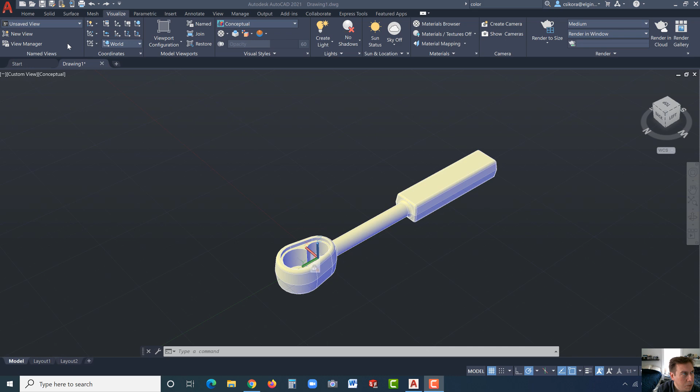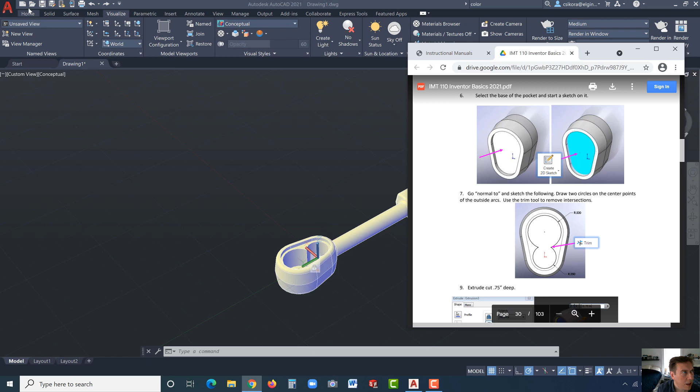So let's begin. First, I'm going to go to New Part, and we're going to use AutoCAD 3D. Again, I'm not setting anything significantly different than the installed version, so I don't really modify it heavily.

One thing though, I do like to go right away and use 2D wireframe, and we toggle back and forth, but 2D wireframe is really nice. And then I also like to go to the top view orientation and just rotate it 90 degrees counterclockwise so that the Y is in the upward direction.

Now we're going to start off with some sketching. We're going to sketch the head and create the head and the features in it, and then we're going to create the other features. Again, there's probably 30 ways to build this model.

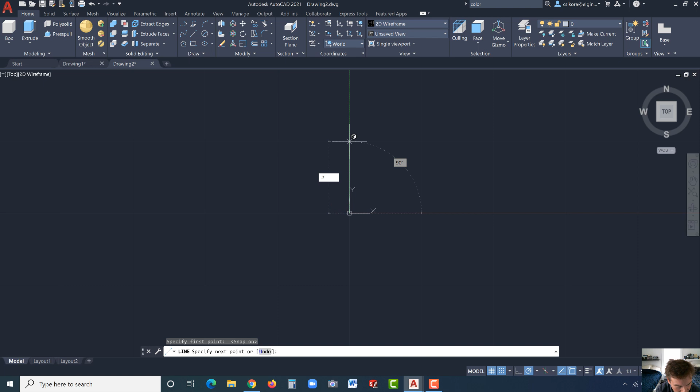All right, I went to the line tool, then I'm going to go down here to snap on, just so I could snap at the origin. Click, and I'm going to drag this up. We want this to be 0.75 in height, and that's actually going to be the distance between the two arcs that we'll see on the head of the ratchet. So I'm going to hit escape after I got that in there.

Now I'm going to proceed. I'm going to use the center radius. And the reason I'm using the center radius is because that's in the textbook that I have, that's what I ended up using.

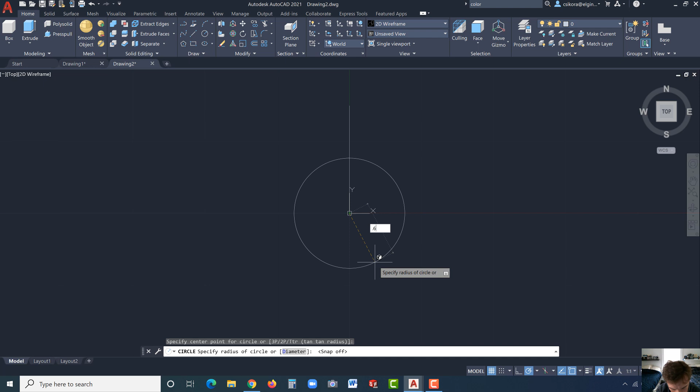So right away we see some issues with the snap-on, so I'm going to turn this off for the grid snap. Let's go ahead and put in, first of all, for this, 0.6. And then now this one we want to snap to—let's hit enter again, snap to that center—and this is going to be 0.75.

Okay, now this is where we're going to use some parametrics. I know there are ways to make tangent lines and other methods, but I like to incorporate parametrics from time to time to show you, because this is truly the way most CAD systems work these days. AutoCAD—I used it starting in 1986—and parametrics wasn't in there, but it came out the next year in other CAD systems and filtered down into AutoCAD eventually too, so it's a very nice tool.

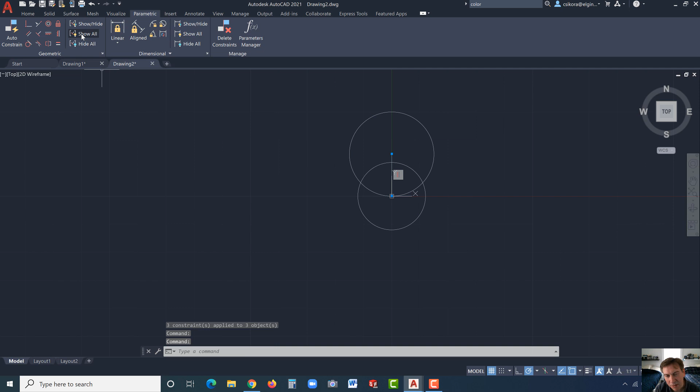So let's go to auto constrain, click and drag around those, hit enter. If you want to see what it did, just hit show all, and you see it just made a vertical line there. But let's go ahead and start adding some dimensions here.

So let's go to the radius tool and click on the bottom there, drag that down, click—it's already at 0.6, so just hit enter. And let's hit enter again, click on this edge. My preview isn't showing, but that's okay, 0.75.

All right, one other thing I'd like to do is use the lock tool.

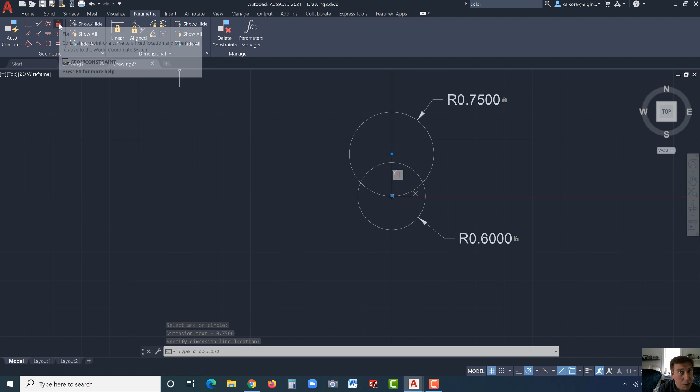Now by locking down either the top or the bottom point, we're in good shape. We just don't want it to move around. I'm going to hit show all again, and you can see the lock down there. All right, so now we have some geometry there.

We're ready to go. Let's go now to the home, and we're going to take the line tool. Over here on the left, away from the head, click and drag a little line, maybe 1.5 inches or so at a slight angle, hit escape when you're done.

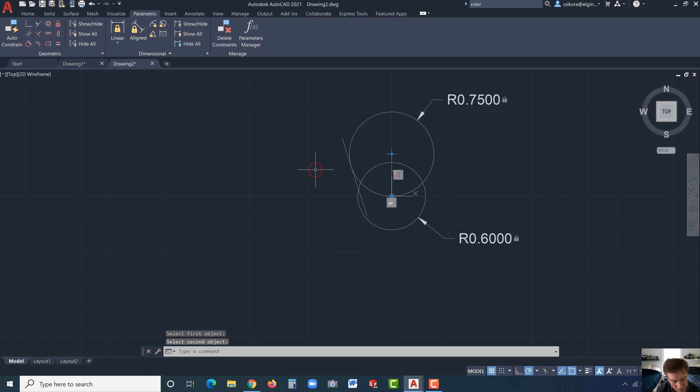Now we're going to go back to parametrics and use the tangent feature and select the circle. We'll go with the 0.75 first, and then the line, hit enter. Hit enter again, go with the circle down at the bottom and the line, and you'll see it should align to each other. So now we could just trim.

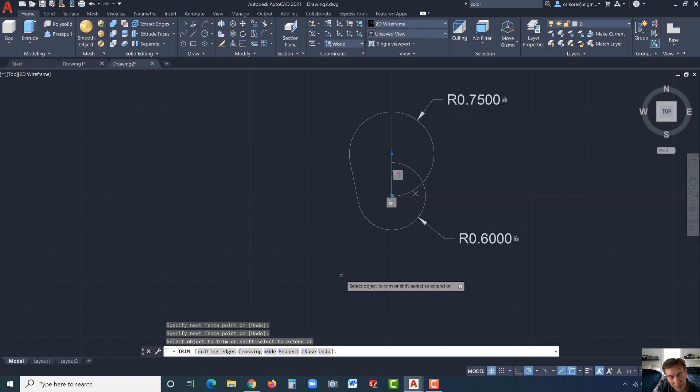Let's go over here to the trim tool, home and trim, and I'm going to trim out this in the middle and get that out of there. And then these little segments. That's why I had to draw it a little bit bigger so that you could trim it up. Now, if it wasn't aligned, you could use the extend as well.

All right, now I'm going to hit escape. I'm just making that half. I'm going to mirror that over to the other side. So let's go to the modify down here, find mirror, and select this line right here. Hit enter and center to this top center point, click, and we should see it on the other side.

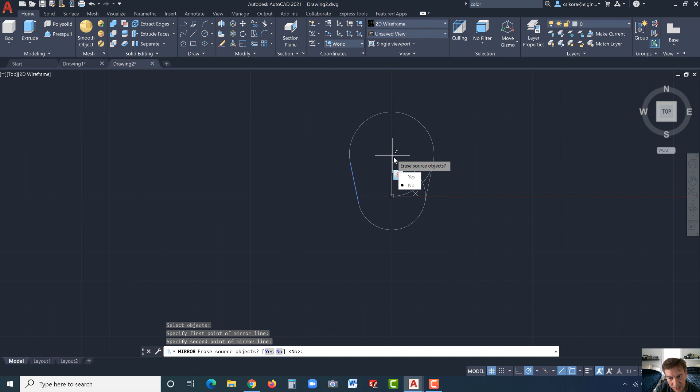So hit no, and now we could go to trim and just trim that geometry out. It's in there. Remember, you could always hit Control-Z undo if you did it wrong, and then trim it again. I'm going to hit escape. All right, so we have the basic form of the head of the ratchet.

Now, what I like to do with AutoCAD, because of the way it works, is I like to put the other details in as well. So, for example, let's go to the circle tool. We have some, actually, let's see the sizes here. You can see here we have this pocket we're going to make.

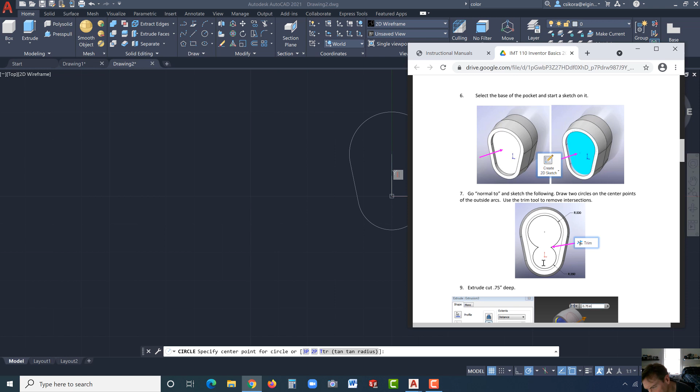The offset, don't worry about. We'll take care of the offset. There's a really nice tool for that. But these are 0.35 and 0.5 radiuses.

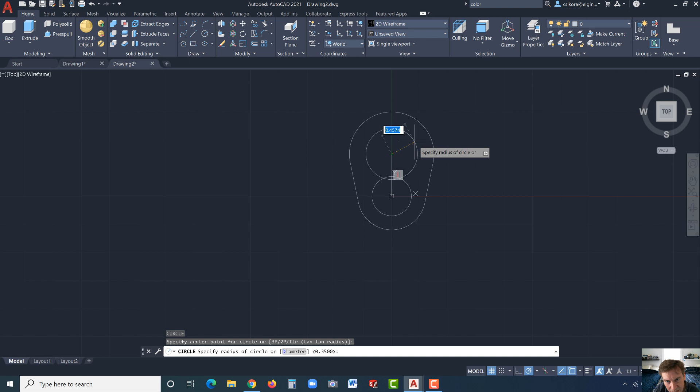So that means we should use the radius tool. So center radius, and just click down here, 0.35, and now hit enter again, get that center point there, drag this out, and this is going to be 0.5. All right, so we have those, and we're not done yet.

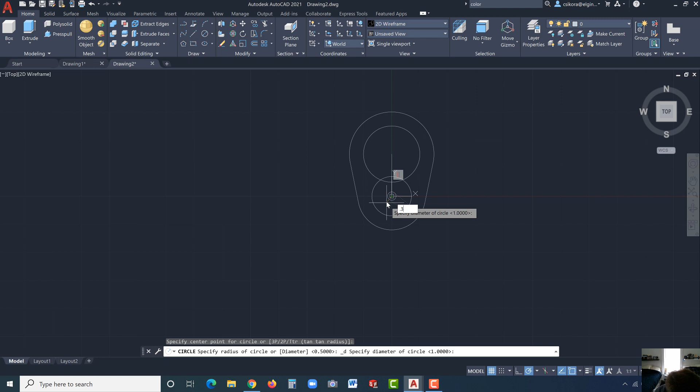Now, there are some through holes that are going to go in there as well, so let's take a look at those, and those are 0.375. And so let's go with, and those are diameter. So this time let's switch it, diameter. Enter again, 0.375.

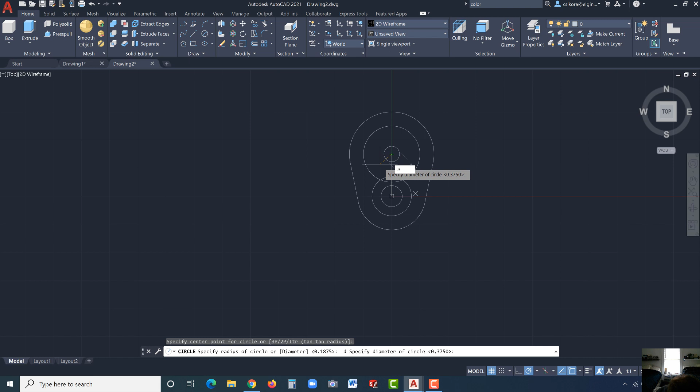Okay, I'm going to hit Control-Z. That's strange, I'm not sure why it did that. Let's go to the diameter again and just draw that up there. Okay, 0.375. It almost looked like it took a radius there. There we go. Okay, so we have the geometry that's suitable.

Now, there is a cool trick where we can make the rod that extends. It's called the transition section between the handle and the head. And we could draw it right on this plane and revolve it. But I wanted to show you how you could switch between planes.

Again, those of you who used Inventor, which is a plane-based modeler, whereas this is what we call a Cartesian-based modeler, where basically you have X, Y, and Z, and it's positional, versus planes you could actually work and sketch off the planes, which is really nice. But you have the ability to do some of that here.

So what I'm going to do, we'll first get this, actually we're going to go ahead and make the transition section, which is the rod, and it's 4 inches long from the center here. So let's go to the home button and see what's going on here.

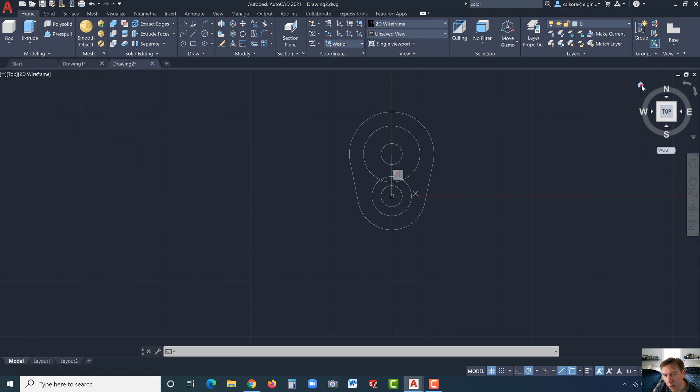All right, so we need to rotate our sketch plane so that we're actually 90 degrees. So that means we need the Z to point downward. So over here, we see we have the ability to do that with the rotate. Now, and this is going to rotate around the X. So click on that.

All right, we just want that to go straight up like that. Click. Now you can see the plane is rearranged, it's been rotated 90 degrees, and so we could go now to the diameter.

Right on that point, draw out a circle. Now look at that, it's rotated, so it's going to be 0.5. Enter. That's how you sketch geometry on different planes in Inventor, but here we're just adjusting the WCS, or World Coordinate System, or the UCS.

All right, so now that we have that, let's go ahead and extrude that right now. We're going to go to Extrude, click on that, hit Enter, and drag that out this way. It's going to be 4 inches. Hit Enter.

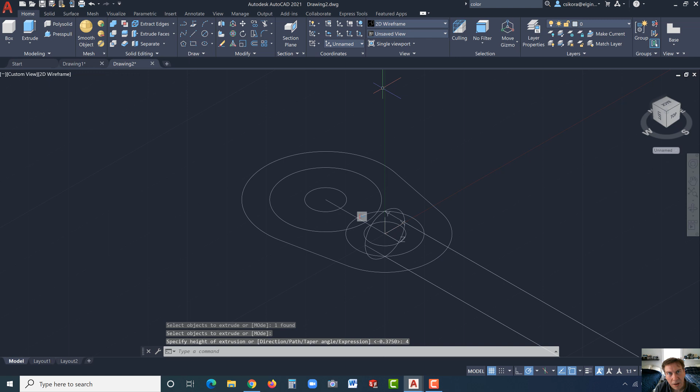Now we can at this time, if we want, change it to shaded in gray, and we could see our boss there. Let's go ahead and move on with this next thing.

We're going to go ahead and extrude the bottom of this geometry. So go to extrude. Now some of you are like, why aren't you using press pull? Press pull has a limitation as far as I could tell. If someone knows a way to do this without a trick, if you have to add draft or the taper, I know I could add it later, but I have not found a way to add it initially.

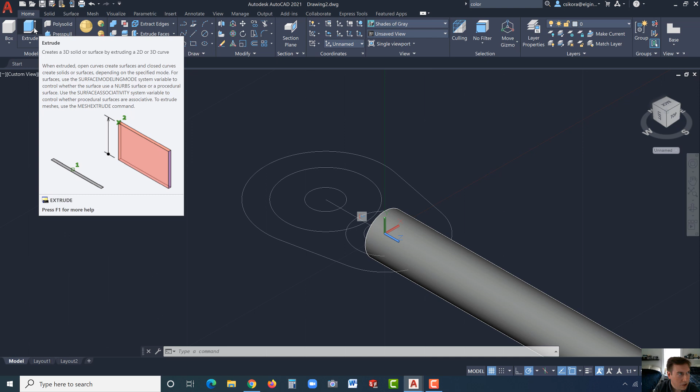So that's why I'm using extrude here. You go to extrude. This geometry, you can see it's all trimmed up, and that doesn't always work really well for an extrude - sometimes you get a collection of surfaces. So what I'm going to do is use the join tool we've used before. Let's join this geometry on the outer edge so that it extrudes as a solid. It's guaranteed that way.

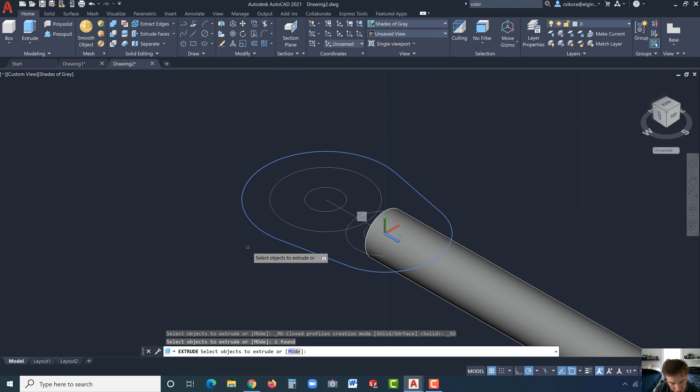All right, now go to extrude. We can now click on that outer edge. Hit enter, and down here we see taper, and we want it to be -7. Actually, I'm sorry, just 7. Let's go back there, taper, so just 7. All right, and we're going to have it go in the downward direction, and this is only 0.5.

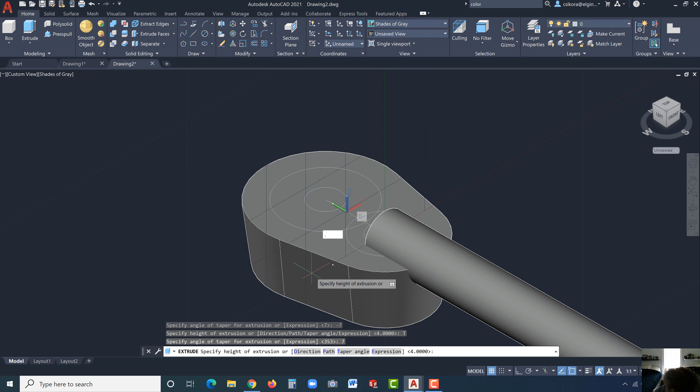All right, now we can mirror that over to the other side. So let's go ahead and do that. We'll go to mirror solid, select this geometry, hit enter. And now I like to go with 3 points.

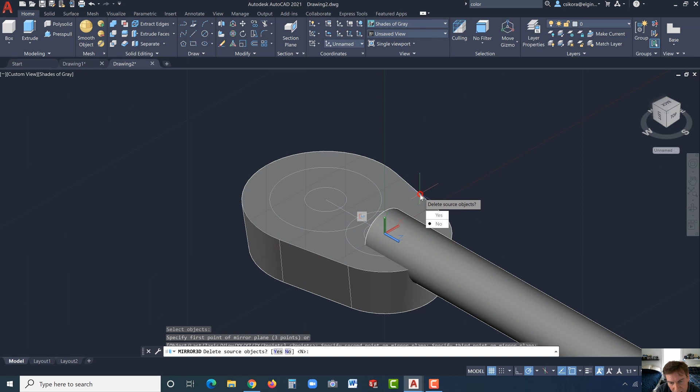There's a dozen ways, but with 3 points I can click on these corners of this model pretty easily, hit enter, and it mirrors it over. Remember, it takes 3 points to make a plane, and that's what it's mirroring about - basically you're making the mirror plane.

Now we could join all these. So over here we go to join, select this one here, and this one here, hit enter, and now they're one solid.

Okay, now we might need to go back to wireframe so we can see inside. Now, what I'm going to do here, I know that the geometry that we have here is going to need to be adjusted and so on. We have the through holes and we have these bosses.

Let's go ahead, and I want to extrude. In fact, actually, I think if we trim this geometry out, right there. Oh, you know what?

We have to get the plane back. So to make sure you get the plane back in order, just go over here to UCS World, and it flips us back. Remember, we had adjusted so we could draw that circle, the half-inch circle, so that brings us back. You could also click on World right here, and it rotates it. So now we could go back and trim on that plane some of that geometry.

So I'm going to trim that out right there. You got to be careful so that you have it looking like that. Now we could go join it again. You don't always have to join it. I'm not entirely certain of all the rules there, but let's join it anyhow.

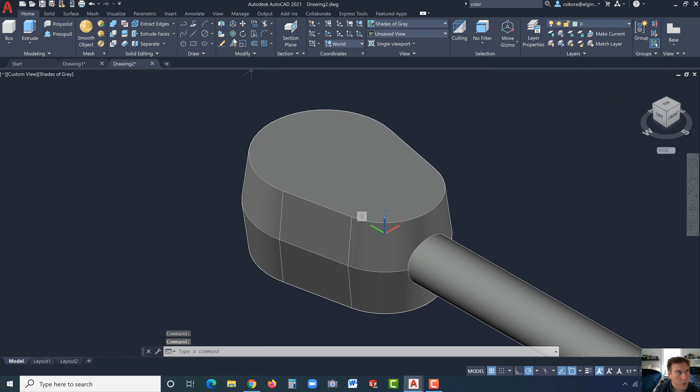Okay, and we'll use that a little bit later, but let's first get our offset. So now we're going to go to shaded in gray, and we're going to use, under solid, there's a really cool tool, offset edge. Select this face, and you can see you could draw this in. Now it says specify a point. Be careful when you enter this information. Instead, we want to go by distance. So I'm going to go down here to distance, and we're going to type in the distance offset is 0.125.

Okay, so we hit enter and then select this face, and it should go inward. So we have that offset geometry. It's a little tricky. You might have to watch me do it again. Just rewind and watch it if you get stuck on that one.

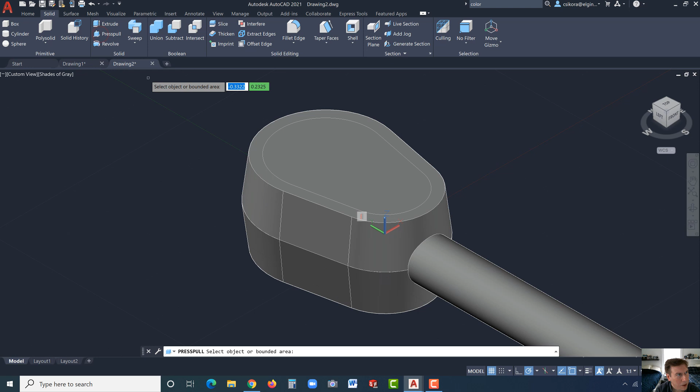All right, now we could go ahead and this one, I'm actually going to try using the presspull. I've had some issues with presspull every once in a while, but let's give it a try. I'm going to click on that and drag it down. This needs to be recessed 0.125. And there it worked beautifully. So most of the time it works beautiful. When I was making this earlier, I was having some difficulty sometimes, and it might have been just sloppy geometry on my part.

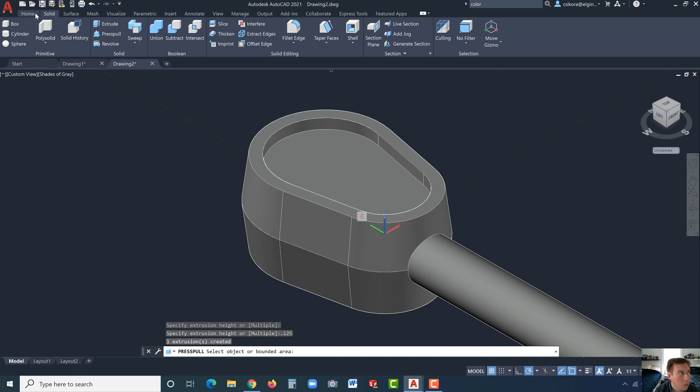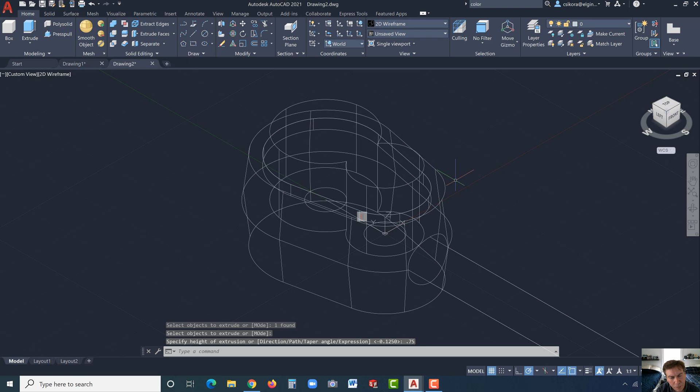Okay, now let's go back to home, and we could go back to wireframe. We want to put the pockets in. So for the pocket, let's go to Extrude, select that like figure 8, and hit enter. And we know this needs to be 0.75 deep, so hit 0.75.

And now what we're going to do is we're going to move it. So to move that, we go to the Move tool, select the geometry. Now it's 1 inch thick, and so we have to recess at 0.25 deep, or we have to lower it by 0.25 so that it comes out correctly. So let's hit enter because we've selected the object. And we're going to go ahead...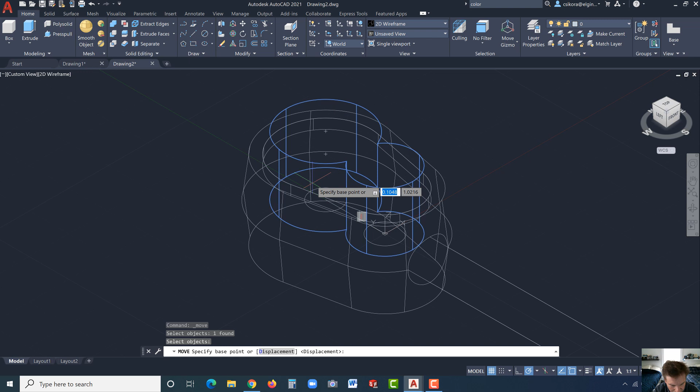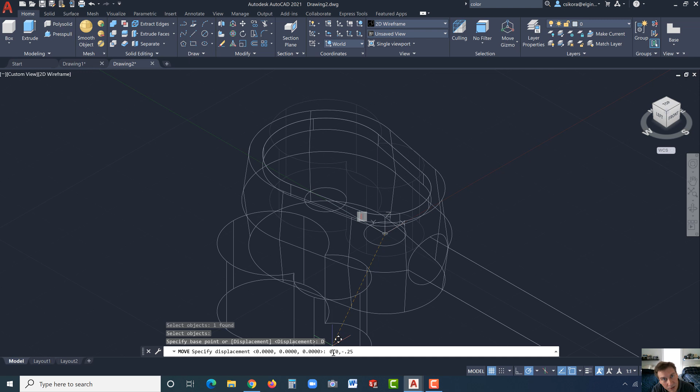Here you have displacement, and you have 0, 0, 0, so X, Y, and Z. And we're looking at just adjusting the Z. So go to 0, type in 0, comma, 0, comma, minus, because you're going down 0.25. So minus 0.25 for the Z. This goes X, Y, and Z in that order. Hit enter, and there it is. It's actually recessed down a bit.

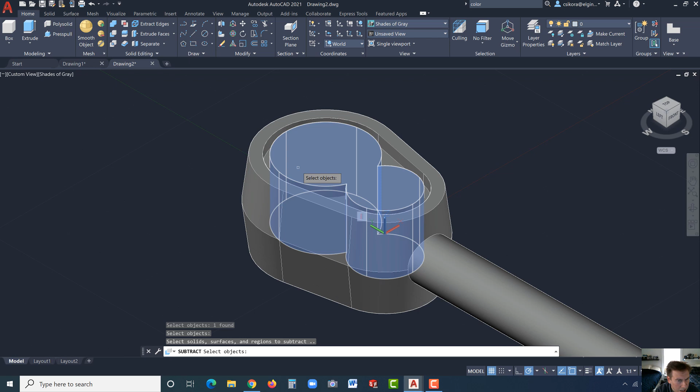So let's go back to shades of gray. There we could see it. Let us now go to subtract. Select this body here, hit enter. Okay, now make sure - I had to hit it twice. I'm not sure if my Bluetooth keyboard might have screwed up or not. But then select this one after the other one turns gray again. Hit enter, and now we have our recess.

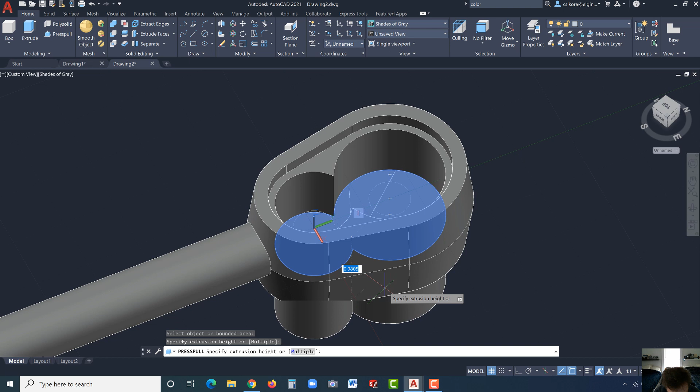Okay, and I just realized actually I should have offset it for the 0.125. That was the recess. So let's try the push-pull or press-pull. Go ahead and select that surface, bring it down, and type in point. See, my pointer is down below the model. You can actually bring it really low if you want. And it's just 0.125. I should have offset the geometry earlier, but instead of 0.25, I should have made it 0.375. So my mistake, sorry about that. Okay, but a good learning experience for all of us.

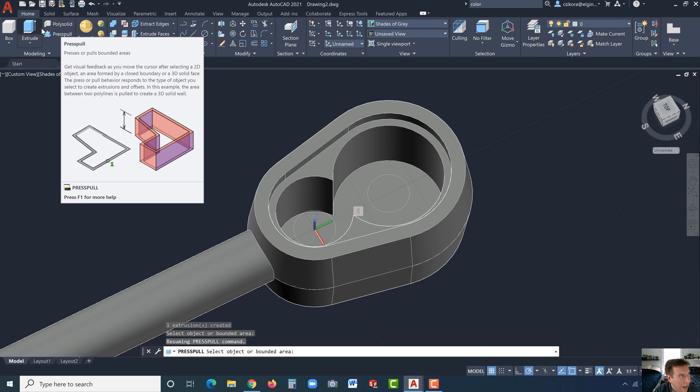Now we just have to cut those in. So let's try - this is where I've had some difficulty with press-pull on these particular geometries. I'm going to go with Extrude because I want to make a video from this and I don't want to have any issues. So I'm going to hit enter, drag that down, have it go deep, hit enter, click on that one, hit enter, drag it down, click.

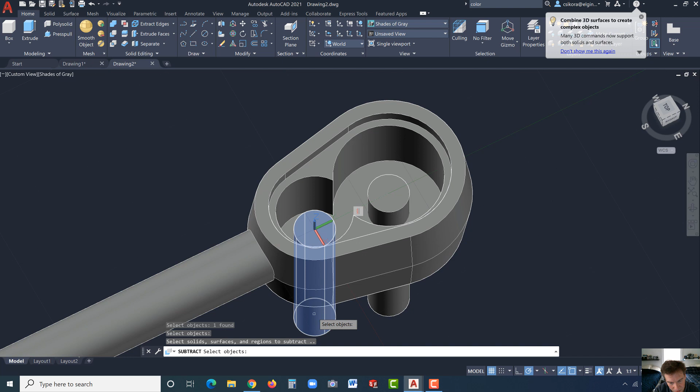Now we could just go to subtract. Click on this, hit enter, select both of those rods, hit enter, and our holes are there.

Okay, we're almost done. We just have to make the handle section. For the handle section, I'm going to go to the top view orientation here. If yours is rotated 90 degrees, that's fine. Go to the rectangle tool and draw out a rectangle over here for the handle. We're going to move it in just a moment, but you can see it needs to be 1 inch tall by 4 inches. Enter. Now go to the line tool.

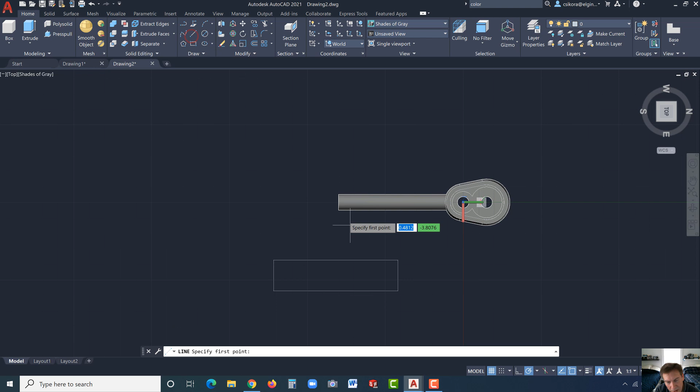Here you'll see I am actually able to select the midpoint. That's because I have the midpoint snap turned on. Make sure yours is turned on as well so you could get that. And then this line needs to be 3.75. Hit escape after you got that.

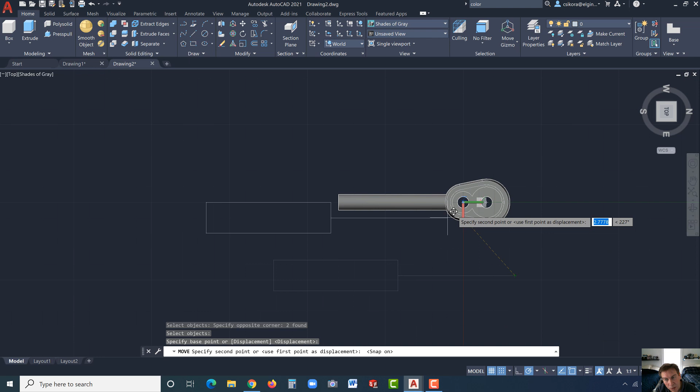Now we're going to go to move. So there's the move tool. Select the geometry, hit enter, enter. And now the positional, we'll select this point right here, and we want that. Oh, before you do this, make sure you go down to snap, so this will force it to snap to the grid, which is centered in the model. Otherwise, it will turn out floating above where we want it.

So let's get it right on there, and then click. Now hit escape, and hold shift and rotate, and you can see that should be centered. Now, if it wasn't, it was because you just didn't select the grid option. I'm going to turn off the grid, the snap to grid.

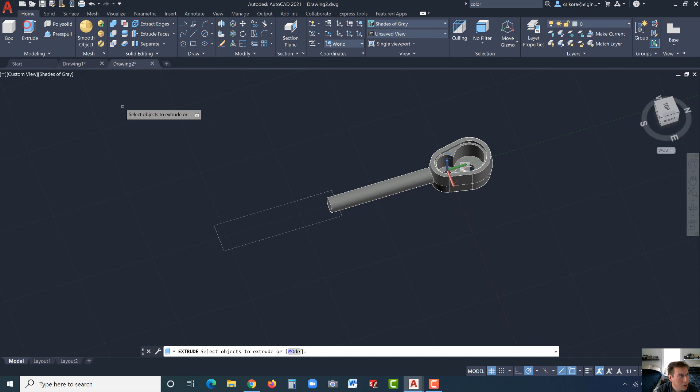Let's go to Extrude, select this geometry here for the handle, hit enter, and we want taper and -7. Did we have to do minus? Actually, I think it was just 7. Okay, there we go. And this is only 0.375.

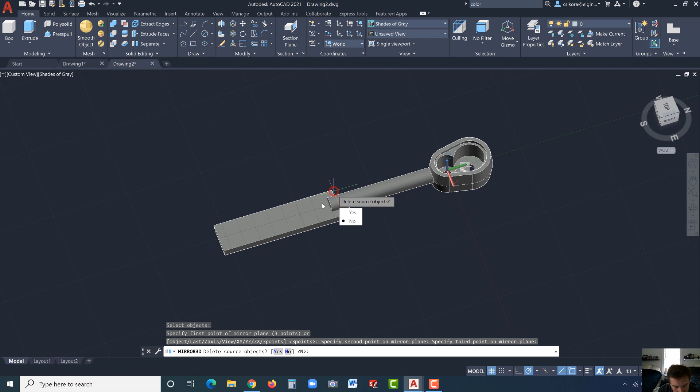Enter. And let's mirror that now. So go to mirror solid, select the solid, hit enter. And again, I like the 3 points, that's what we used before. So just make sure you get these corners. There's one there, there's one there, and one there. And there it is. Okay, so we have the handle.

Let's Boolean this, or solid union this together. So select this model, this one, and that, hit enter. And now when you hover over it, it should all turn the same color because it's all one solid.

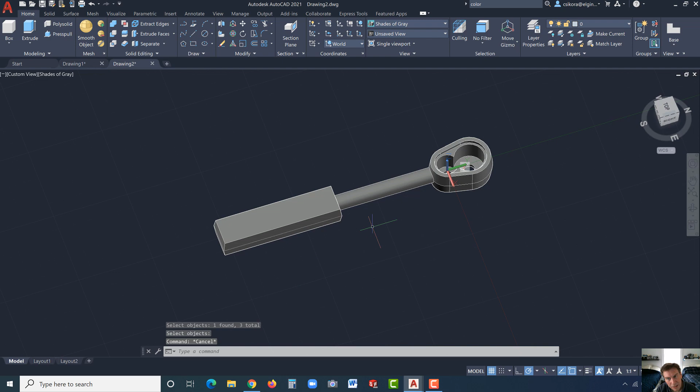Okay, let's work on the fillets here. Let's zoom up to the head, just scrolling with my mouse, get up there pretty close. There's no penalty for zooming up too far, it just makes it easier for you. Let's go to solid, we're going to go to fillet edge. The first fillet, go to radius, and we're going to set that to 0.1.

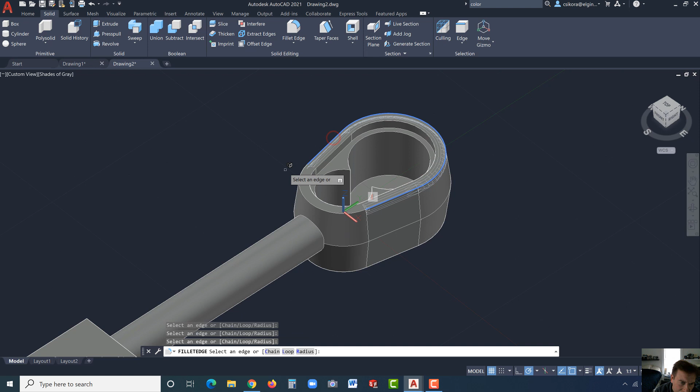Hit enter, and you're going to select these edges. And again, I've mentioned it in previous videos, I don't see it here, but if someone knows of a way of tangent propagation, please let us know in the comments below. I'm going to use my Superman X-ray vision right there. Got that. Then we're going to select around this edge here and this bottom edge there.

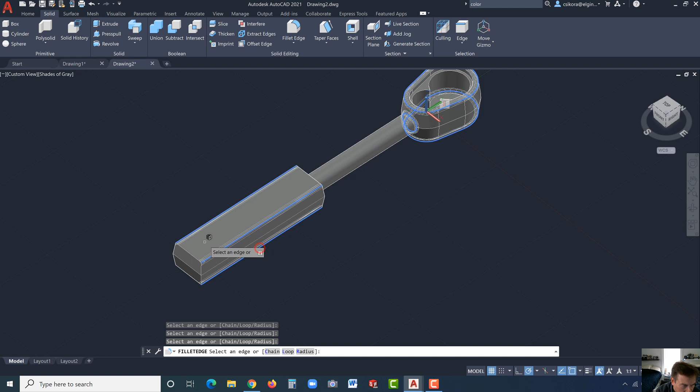Zoom out. Let's get the handle, just the lengths of the handle. And again, Superman X-ray vision down here. There we go, click, and rotate. And let's get this here, that there. Hit enter 2 times.

And then finally, we just have smaller radiuses of 60 thousandths that we have to put in. So fillet, radius 0.06, enter, and it's just around this. And let's go ahead and select those.

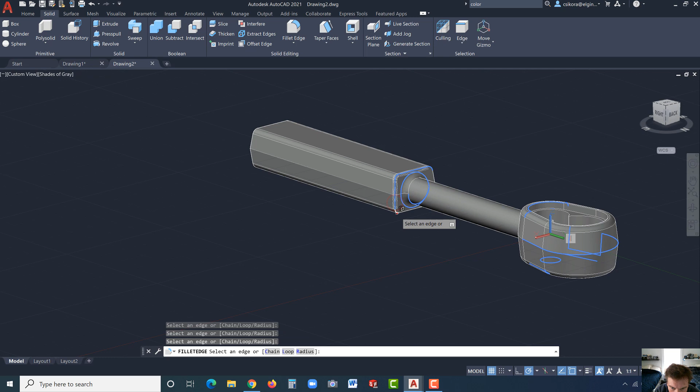Now, Inventor does have tangent propagation, so you don't have to select all these edges typically when there's a radius there. That preview didn't work there, so I just kind of knew I was floating over it and went with it, and it selected it.

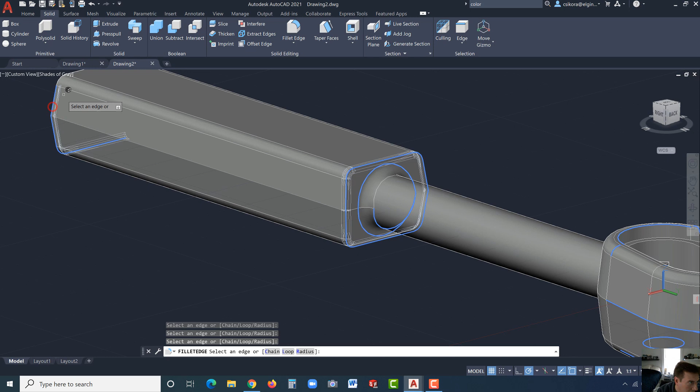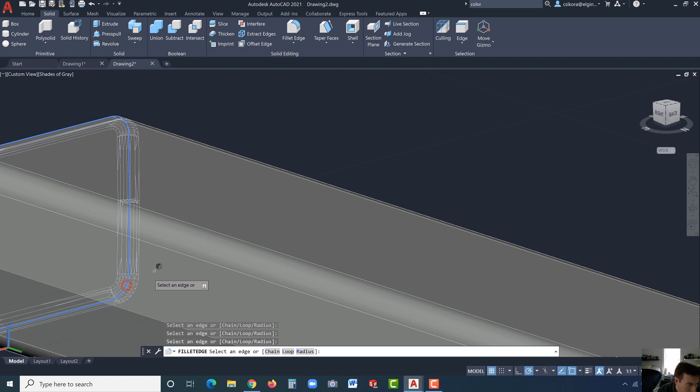Okay, almost done. Let's zoom up really close in that one. You could rotate too if you like. I'm being lazy, not rotating, trying to use my X-ray vision here. And it's working quite well. Okay, hit enter and enter.

And there we have it. We have our ratchet completed. Then just go to File, Save As, capital E3, or just File, Save, E3, whatever, and you're done. And that concludes exercise 3.